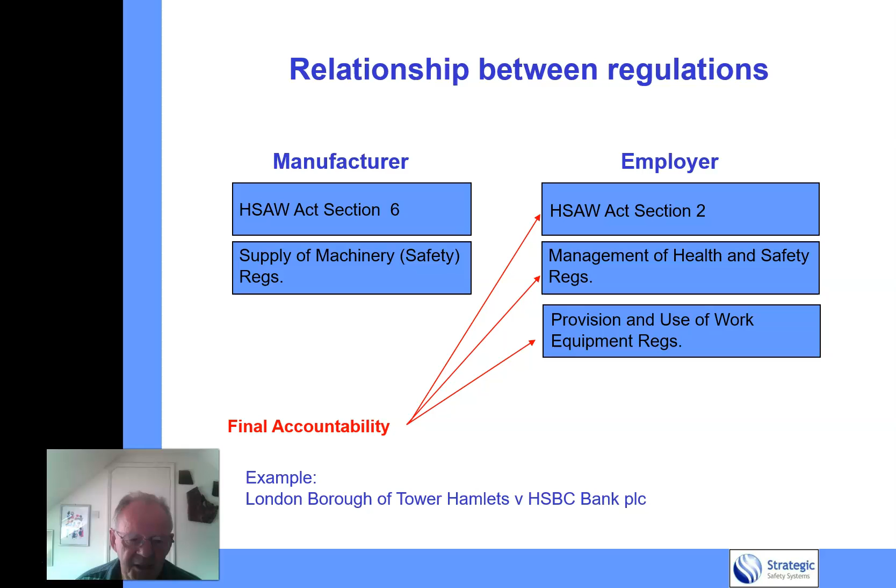And I cite the example of the London Borough of Tower Hamlets versus HSBC Bank PLC, something which happened about 20 years ago, but I was personally involved with. It may seem strange that we're talking about a local council, but it was because this was a shared building. The majority of the building was offices, so it came under the council rather than the Health and Safety Executive.

They didn't need to be exposed, they could be guarded quite easily with a fixed guard, which is what IMA put into place afterwards. But the case was taken out against HSBC, mainly because it was easier to prosecute a British organisation than a Spanish organisation. I was in the unfortunate position where I'd been asked to investigate this machine by HSBC and give my views on the design standards of it, and my report was then used by Tower Hamlets Council in the case they brought against HSBC.

And I was instructed as an expert witness. Fortunately, it never got to court. They pleaded guilty on the Friday afternoon when the court session was supposed to be on the Monday.

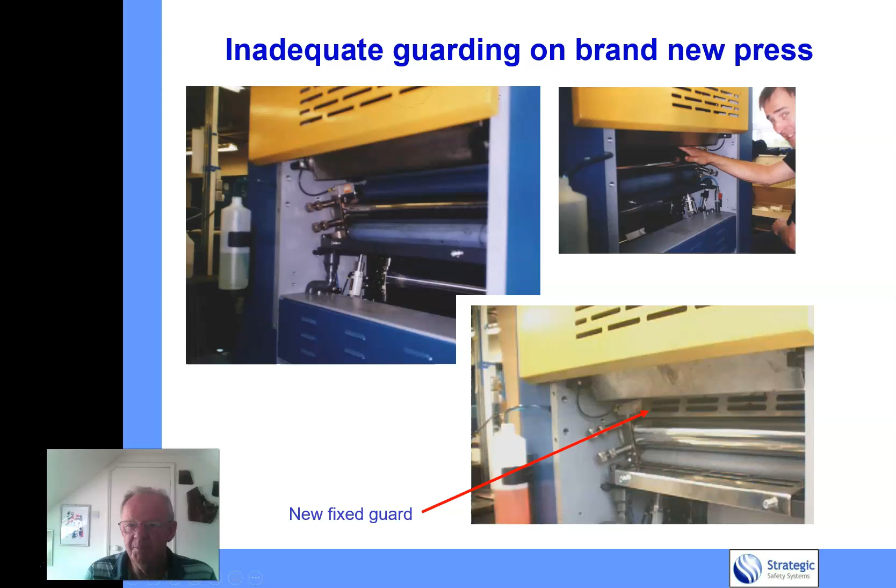What is safety and what is reliability? Safety, in my opinion, is the prevention of hazardous situations occurring. And reliability is the confidence that those measures put in place for safety reasons continue to do their job.

When I started driving, which was a long time ago, about 50 years ago, cars had single circuit braking systems. That is, you put your foot on the brake pedal and that acted on the master cylinder, and hydraulic pressure went through a single pipe, split four ways, to the cylinders on the individual brakes. If you had a leak in that system, then you lost braking completely.

You only had the handbrake and your faith in the Lord to stop you. What happens these days is that cars have dual circuit brakes, that is, there's two circuits. If you get a leak in one circuit, then the other circuit continues to operate and will apply pressure to the brakes. Furthermore, it actually compares the pressures in the two circuits, and if there's a leak in one circuit, that will bring up a light on your dashboard, and that won't go out until you've had it rectified.

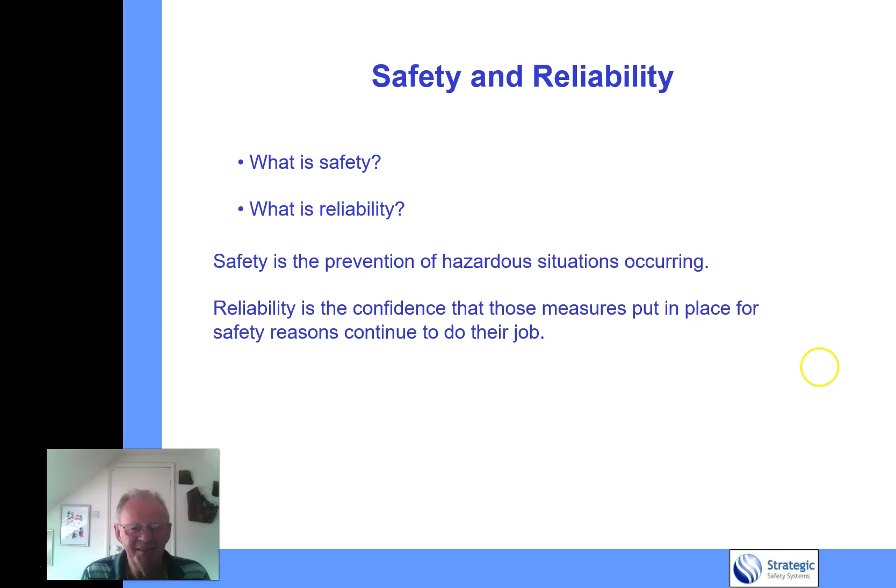Were the brakes in the olden days unsafe? No, they weren't. Were they less than reliable? Yes, they were. So reliability is the confidence that we've got that the brakes will continue to work.

Reliability in safety devices is first about prevention of failure, then coping with failure. So the braking system would actually cope with one system failing and would keep the whole braking system working. But it also has to tell you that something has failed, because it's pointless having a dual circuit or redundancy in any kind of safety system unless you actually know that the failure has occurred. If you don't have that, and one system fails, you've still got a single system left, and you don't know what's happening.

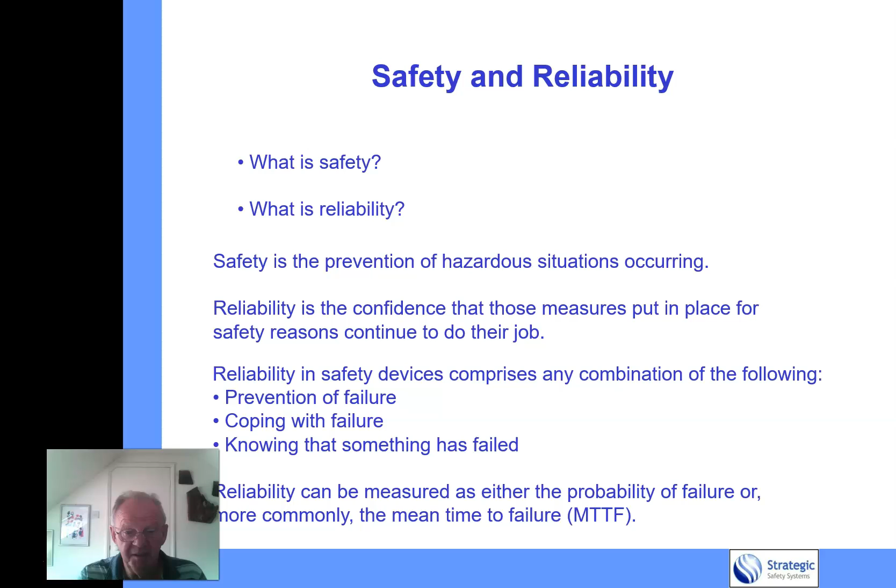Reliability can be measured in probability of failure, or more commonly, the mean time to failure.

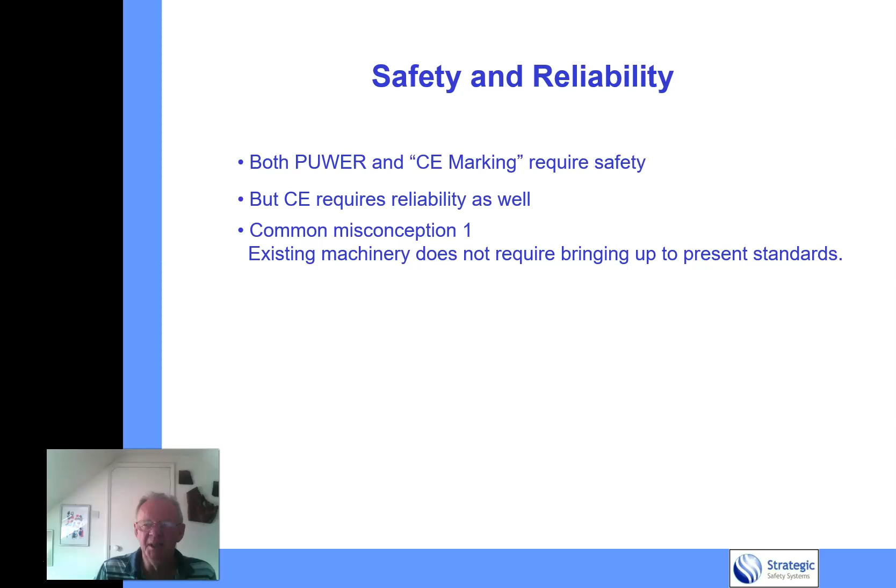Now, the difference between PUWER and CE marking is that both require safety, but CE marking requires reliability as well. The common misconception is that existing machinery doesn't require bringing up to present standards. That's not quite true. Existing machinery must meet the requirements of PUWER - you can't get away from that. But you don't have to bring it up to the standard of reliability that CE marking requires.

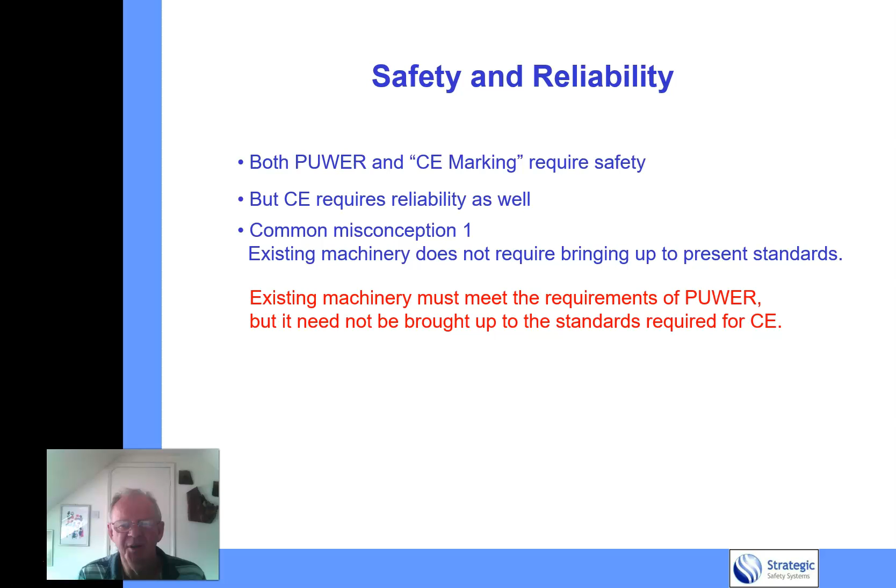Now, I was doing work for Formit. I helped them with their CE marking, and I was providing support for them on a machine being installed at a company in Wellingborough, and there was nothing wrong with that machine at all. Excellent guarding in place - fixed guards, interlock guards, light curtains - the whole combination was appropriate. But next to it was another machine which was completely open, an older machine.

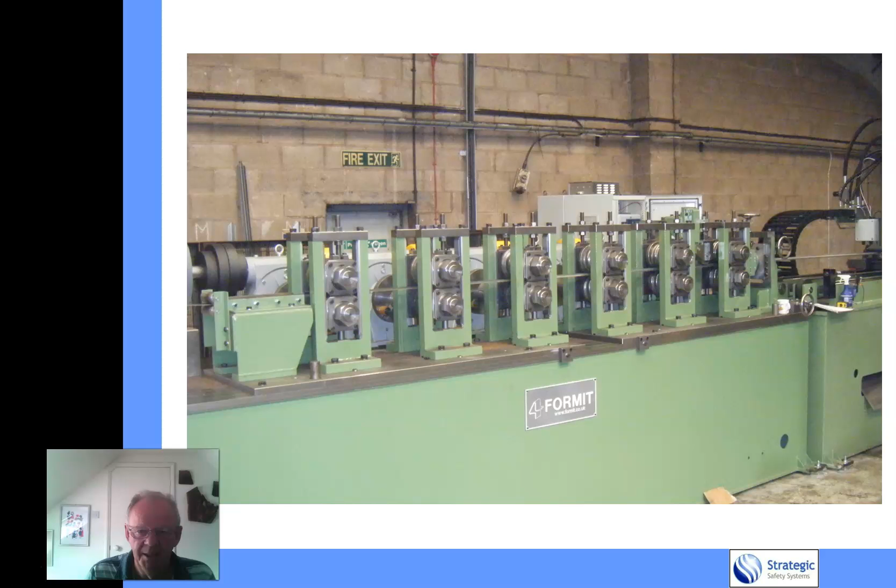Right, the Provision and Use of Work Equipment Regulations have got various clauses in them. Nothing unusual there - it's obviously got to be suitable for the task that's got to be done. If it requires maintenance to keep it safe, then you've got to have a written system of carrying out maintenance. Similarly for inspection, if it requires inspection to keep it safe, then you need to do that. Obviously, controls for stopping, starting, etc.

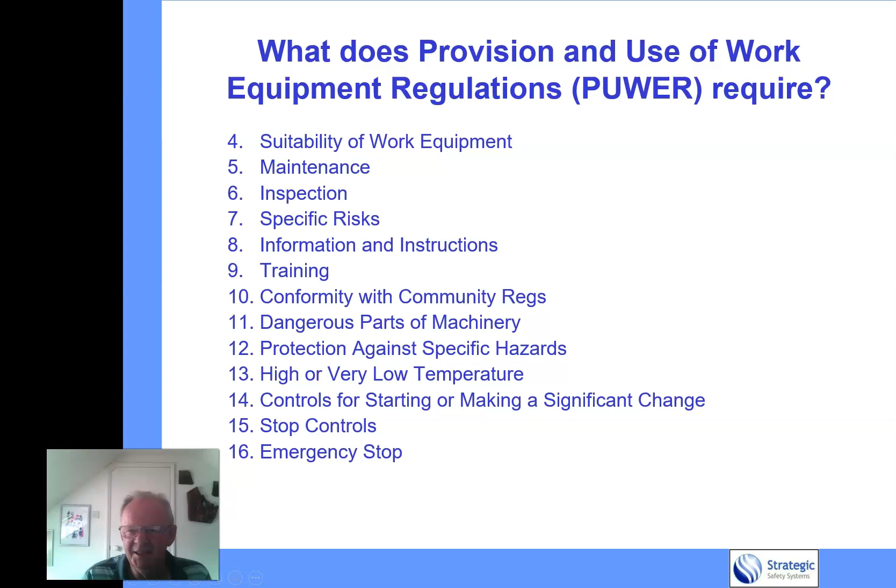And then we've got a whole load of things about isolation. You've got to be able to shut the thing off and lock it out if need be. And then these last things were put in at the last revision because of issues we had over forklift trucks overturning, etc.

Now, PUWER makes no requirement for an assessment. You occasionally get people trying to flog me their services, saying we carry out PUWER assessments as required by the Provision and Use of Work Equipment Regulations. It makes no requirement whatsoever for an assessment. You've got to comply with it, so it would be a good idea to review the equipment to make sure you are compliant, but it makes no requirement - it doesn't actually say there is an assessment required.

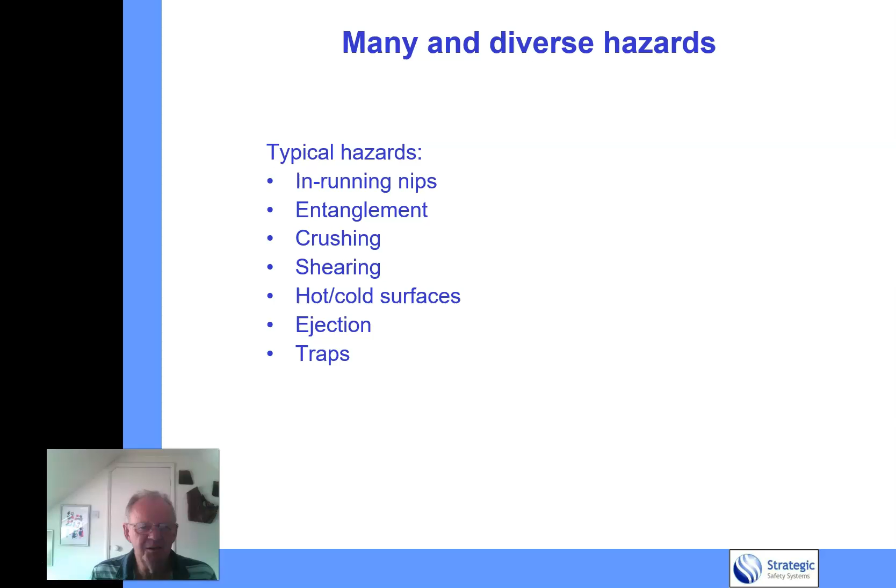There's lots of things that you can get caught on in machinery. In-running nips is a common one, between two rollers running in towards each other, or something like that - you've got a roller going round and you can draw your finger into it. Entanglement, crushing, shearing, all of those things.

The kind of risk controls you've got - PUWER 11.2a puts fixed guards as the primary control, and then you've got other things afterwards. I would actually say, or some people would argue, that proper interlock guards are preferable to fixed guards. Don't know about that, you can argue with that. Certainly, fixed guards are only suitable for those things which you never need to get into, or only ever need to get into for maintenance reasons. So, for example, let's say you've got a belt that goes between pulleys, and you occasionally need to change that belt because it gets worn.

You have to get in there every couple of years or so and do that. Fixed guard is perfectly adequate for that, providing you isolate the machine before you take that guard off. You take the guard off, do the maintenance work, put the guard back on again, and that allows you to run the machine again.

I would put these things in order - this is my sequence of things. Interlock guard: a physical guard that's something you can't actually get through. An active or presence sensing device, so light curtain, pressure mats or something like that - they don't actually stop you getting to the dangerous bit, but they would do something if they sensed you and stop the machine, normally before you get there.

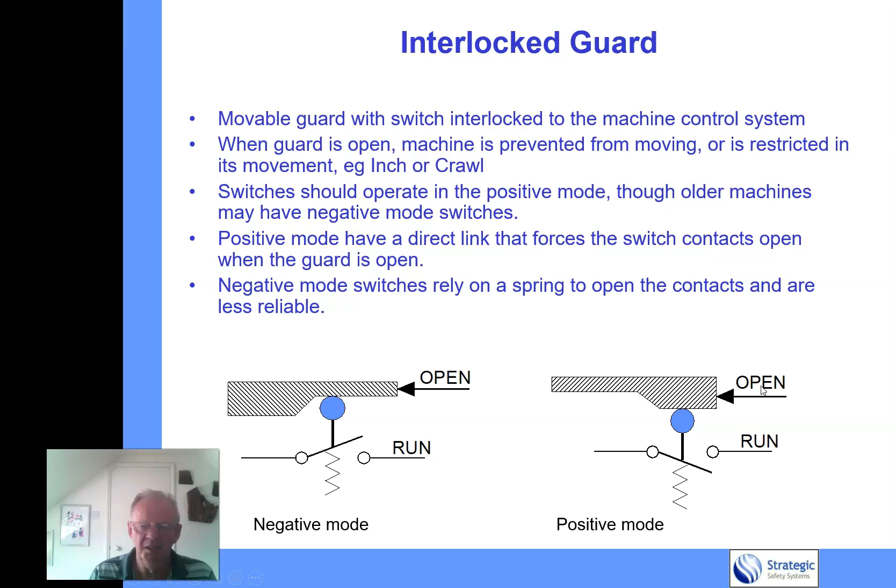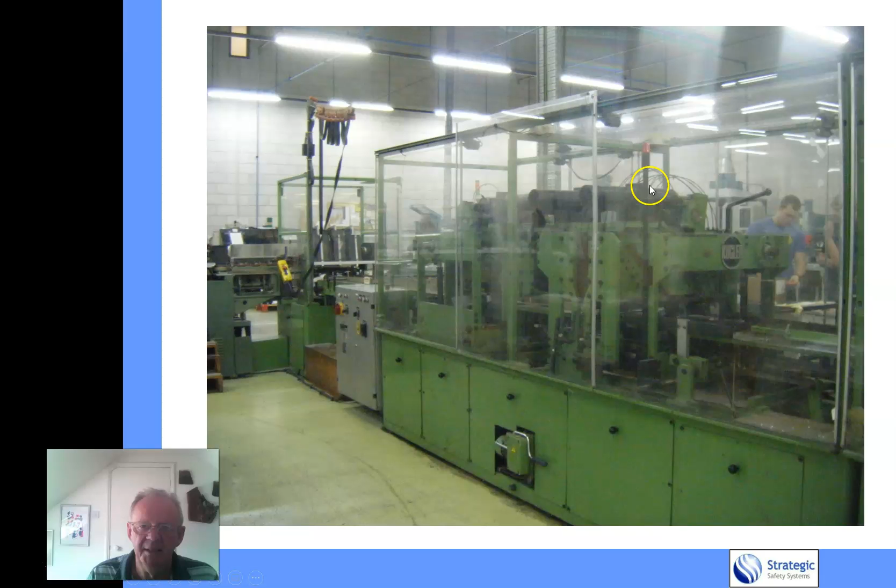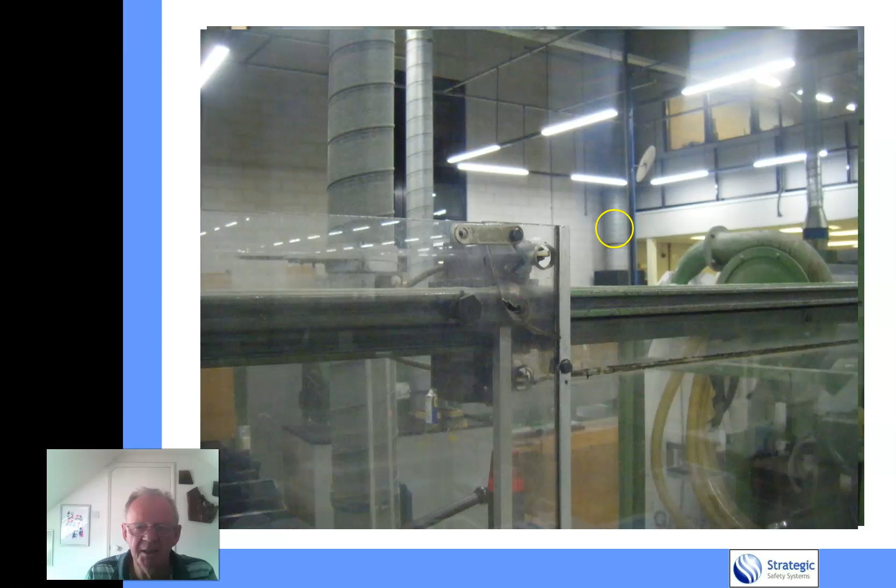You've got to be wary though. This is a machine at a company in South Devon - I can't quite remember what it does, it's part of printing equipment - but it's perfectly safe because it's got this guarding around it, these plastic screens that stop you getting in there. If you look at this thing here, to open it and get into it, you slide this guard, this centre one. If you look at it, it's got a switch operating in the positive mode. Ignoring the fact that the guarding is rather broken, we've got a contact on the interlock switch just there, which pokes through a hole when the guard is closed - that's operating in the positive mode.

So as soon as we slide it one way, the guard contacts force the contacts of the switch open and stop the machine. I don't know if anybody can spot the downside to this arrangement - if you switch it the other way, it will again shut off the machine, but then effectively the switch would be operating in this region of the guard, and it would think that the guard is closed.

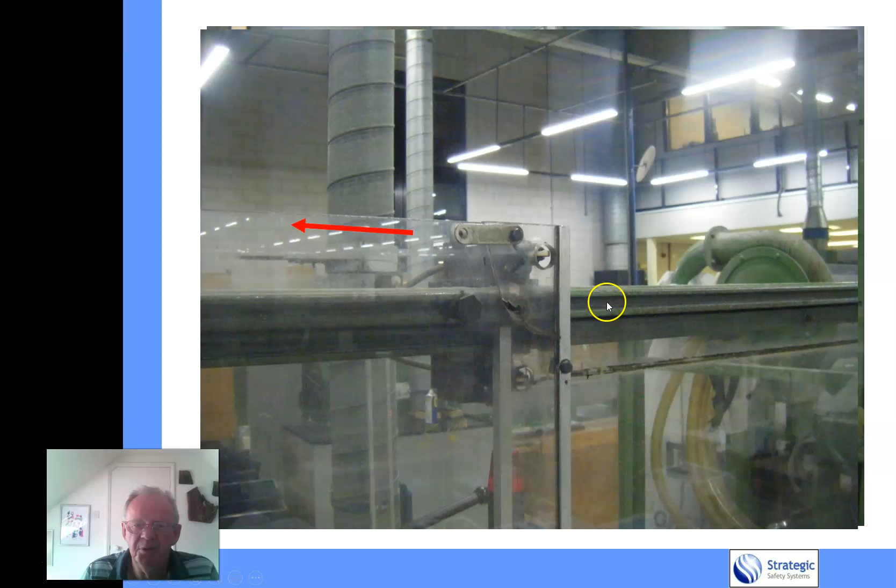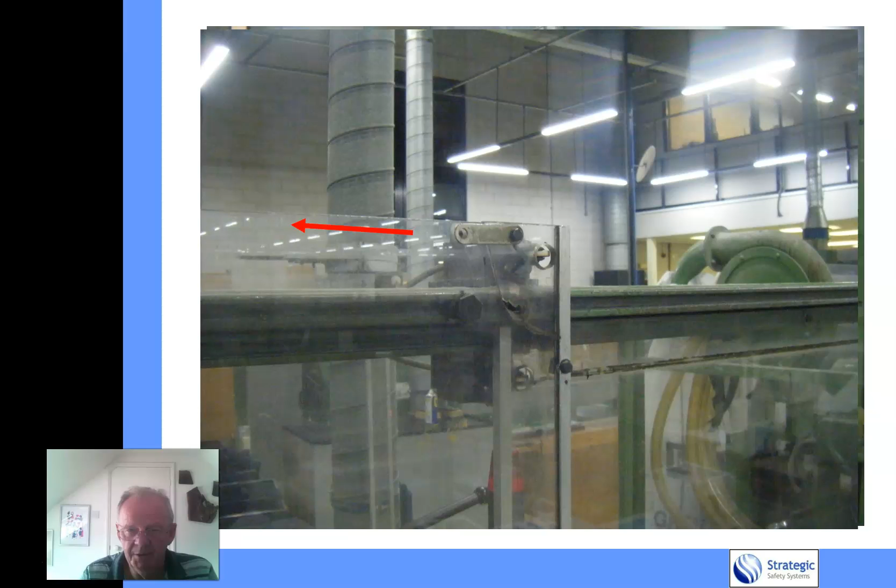That's obviously an unsafe situation, and we quite simply got round that very easily by, at the other end of this track, we just put a bolt through there, poking out, which stopped you moving in this direction. It's a 20-pound solution to it.

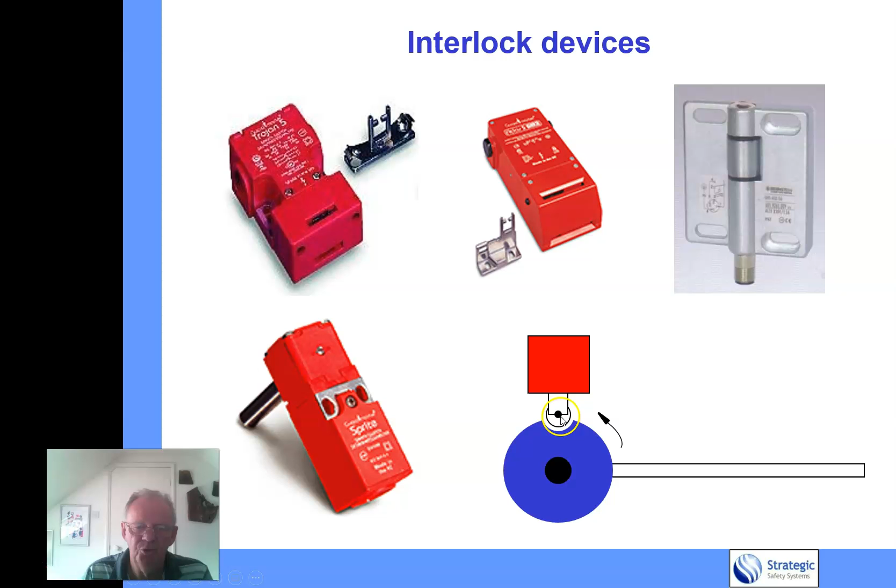Here's an arrangement where we've got this guard, which when you pivot it about this shaft here, it will force open the contacts in this switch. This shows that arrangement, but you've got to be aware of that - this is the guard, this mesh thing that pivots about this shaft.

It's on a Mark Andy roll label printing machine, and I don't have the confidence that cam is going to contact that switch. It might just about do it, but it doesn't look like it. So you've got to make sure that it does actually contact that switch.

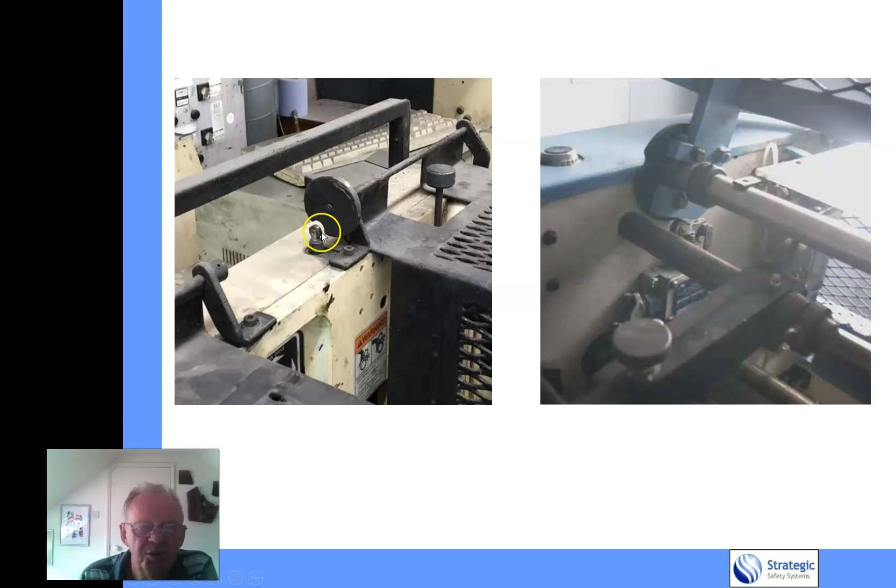And here's another piece of machinery, again with a cam and a switch just there. But this shaft, this guard here, can slide from side to side - bit of a sloppy thing there. And if I moved it to this far left direction, which is what I did, the cam would no longer engage that switch, so it wasn't actually operating.

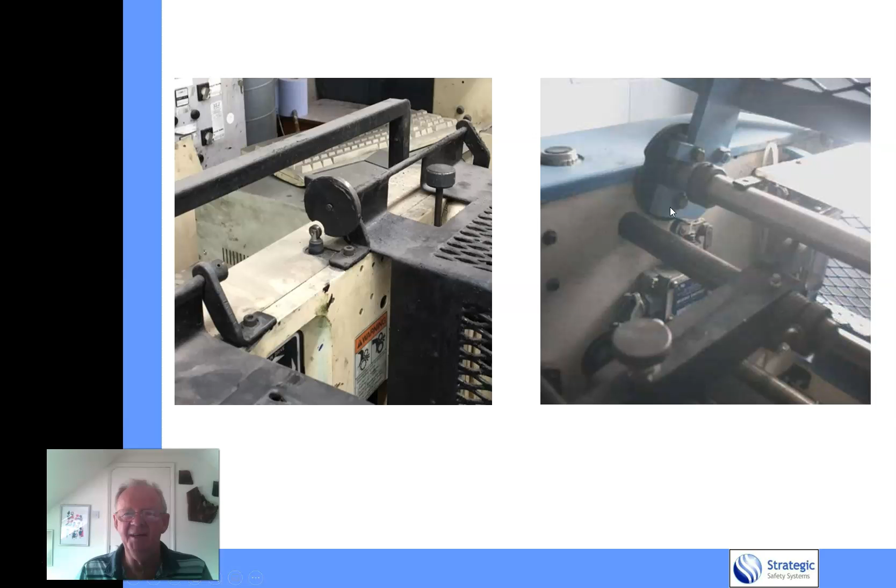We have to put in a little packer piece in there to stop you moving in that direction to get around that problem. It didn't take very long, just a bit of angle iron that was bolted in, but it's something you've got to realise.

Now, the first rule of mechanical guards is they must be practicable. This was a company up in Clitheroe, somewhere in Lancashire, and they'd had a visit from the HSE. This company makes very complicated components, predominantly for Rolls-Royce - the big fans on the front of Trent engines are made by this company. But they've got a couple of little machines like this in a corner, and the HSE said that it needs guarding.

So they put this interlock guard in there. And you cannot operate that machine with this guard closed. So it's a totally pointless piece of guarding. It is totally useless.

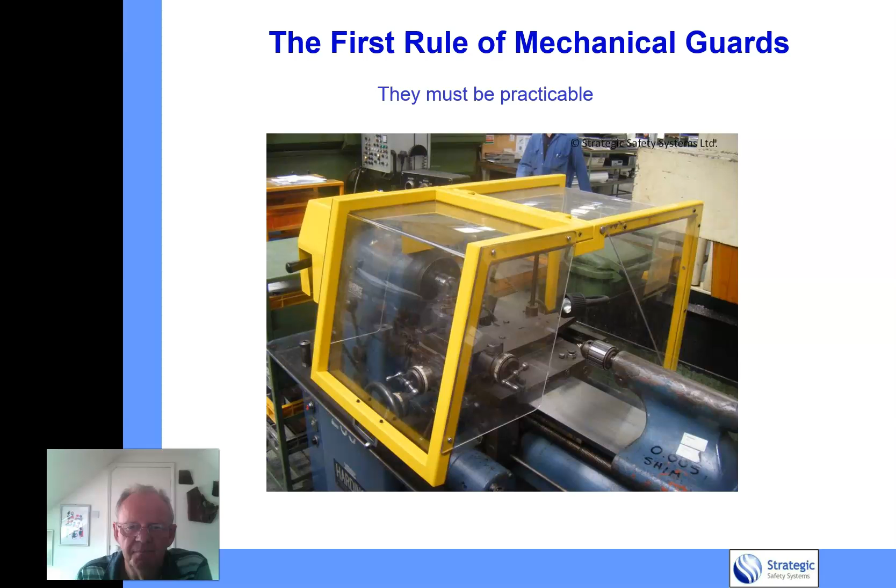Now, this bit is something you would never get in any textbook. I don't know why, but nobody's ever written this down. But I believe that there are three general categories of mechanical guards: immediate, local and perimeter.

Now, immediate is something just right at that point. You notice that guarding there, it stops you getting your fingers into that danger area. Local is something which is far more common and preferable, and that's to have a guard around this whole thing there. And then perimeter is you put a guard around the whole machine.

Now, local is by far the most preferable of the three alternatives. With immediate, you've got to be very careful about the kind of hazard that you are guarding. If it's operating very quickly, then that won't do any good at all.

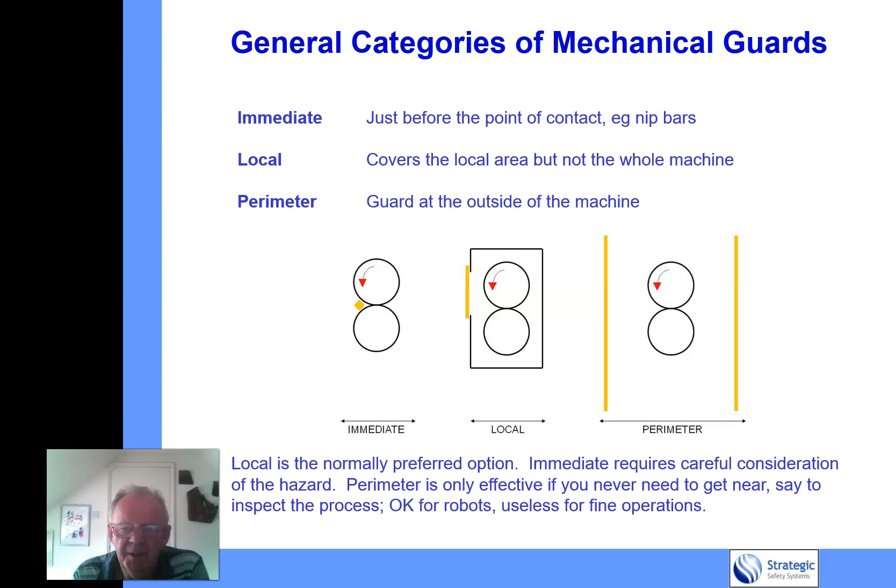With perimeter, which you might get with, say, an injection molding machine, with a robot unloading that machine and putting it onto a conveyor which goes out through a tunnel guard, that's great. But if you need to get in there and do anything, perimeter is useless.

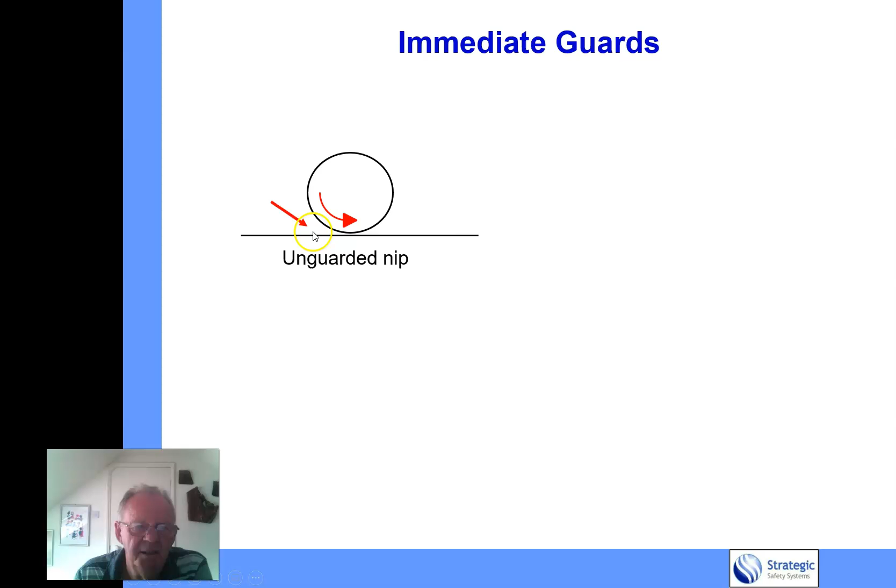Now, here's an example of an immediate guard. We've got this in-running nip here. You don't need to have two rollers - it could be between one roller and a fixed surface. The way to stop you getting your fingers in there is to have this fixed immediate guard here. It's got to be at 90 degrees - you can't have a wedge shaped guard, that's useless.

The requirements, the general guidance you won't find written down anywhere, but the general rule of thumb is that it should be 6mm maximum, because you can't get your finger into a 6mm gap. Now, be very careful with this, because if you've got something like a rubber roller, then that will deform and can get your fingers in there.

I had an accident with a company down in Southampton where somebody got his finger wedged in a 3mm gap. Now, you try and get your finger wedged into a 3mm gap, it's very, very difficult. But if you've got a rubber roller which deforms, then you get your finger stuck in there and you can't get it out.

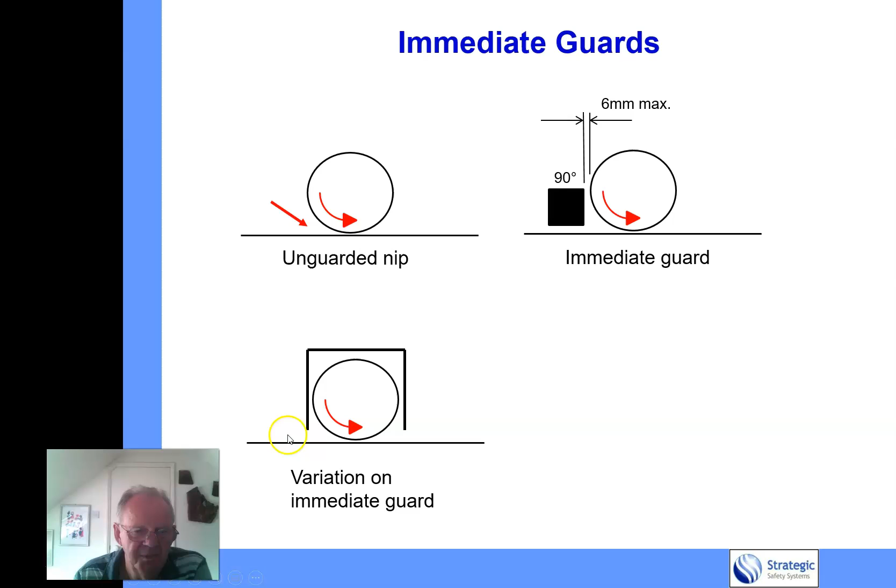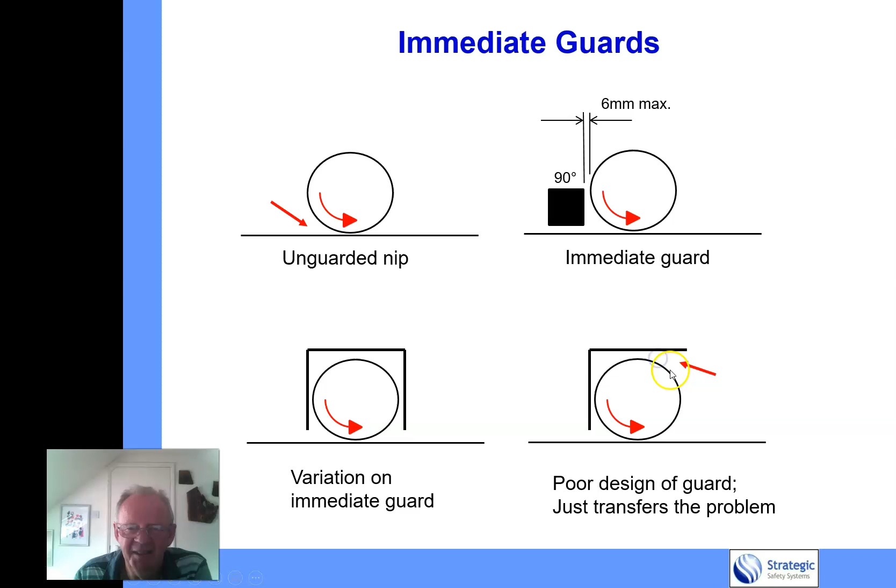There's a variation on an immediate guard, which is this, and that's fine. No problems with that at all. You can't get your fingers in there, and that's great. But what you mustn't do is do this kind of thing, which is just shifting the problem from there round to there. It's a poor design of guard. You've got to think about what you're doing with the guard when you put it in place. It's not only the primary control which is there, it's the other thing.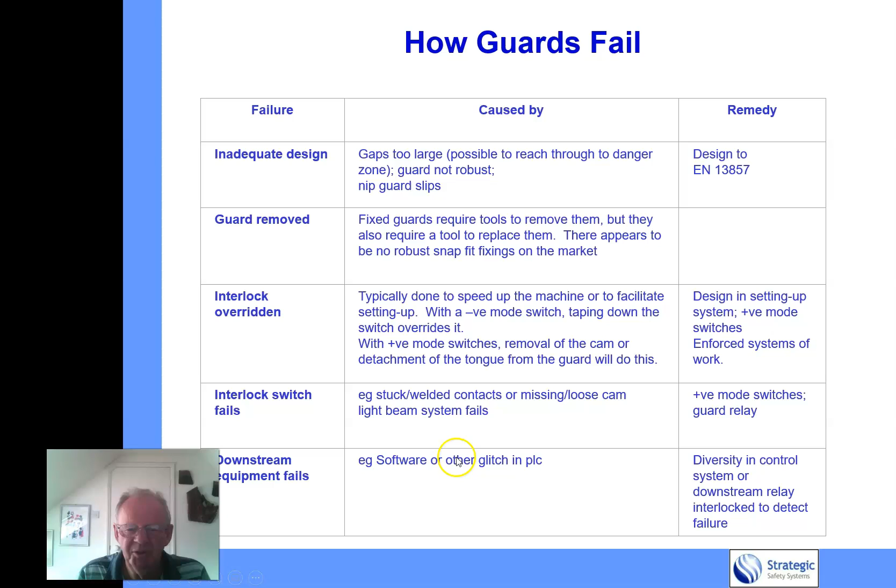You can override the interlock, taping it down, and you can do things there. The interlock itself can fail - stuck or welded contacts, or there could be downstream equipment or a glitch in the PLC. We'll come to that later on. Active devices - you've got all of these things: light curtains, pressure mats. I don't think they are as effective as a physical barrier.

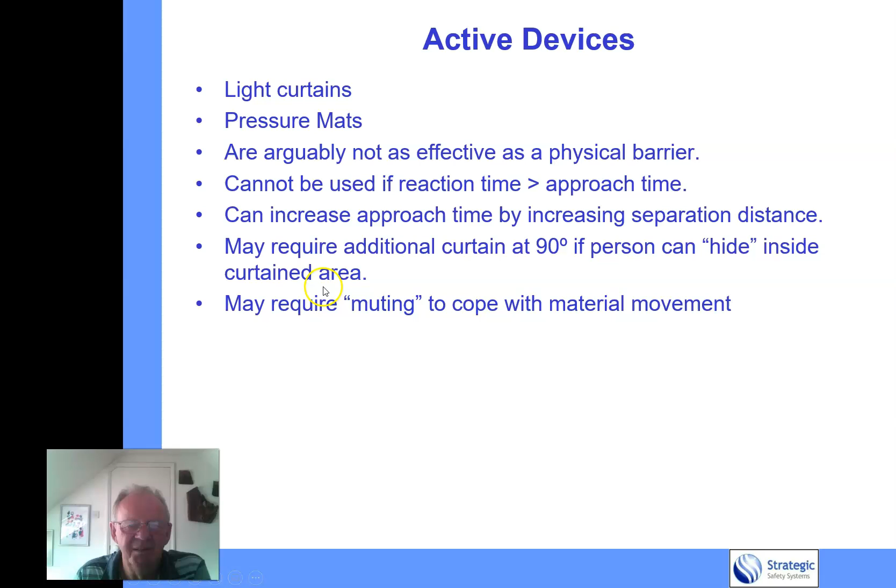You can't use them if the reaction time, the time to stop the machine, is greater than the time it takes to approach the danger area. So if you're just putting your hand through a gap, the machine has got to stop pretty quickly. You can increase the approach time by putting the light curtain further away, but then you've got to cope with people being inside that area.

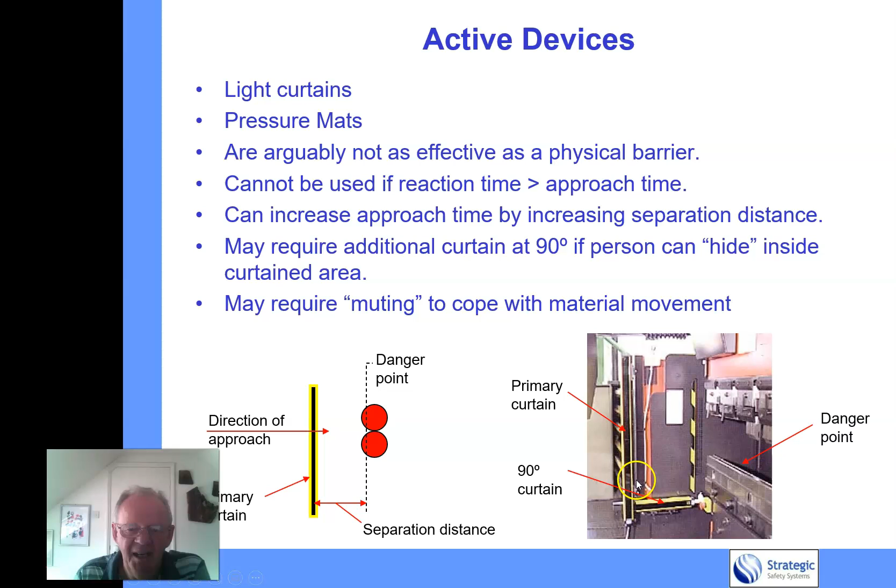So, for example, this is the kind of separation distance. This is one way on a metal press brake where they increase the separation distance, but then they put this other horizontal light curtain which will actually detect that somebody's standing in that area. If you didn't have that, you could break the light curtain and be inside that area, and the machine could then start up because the light curtain is no longer broken.

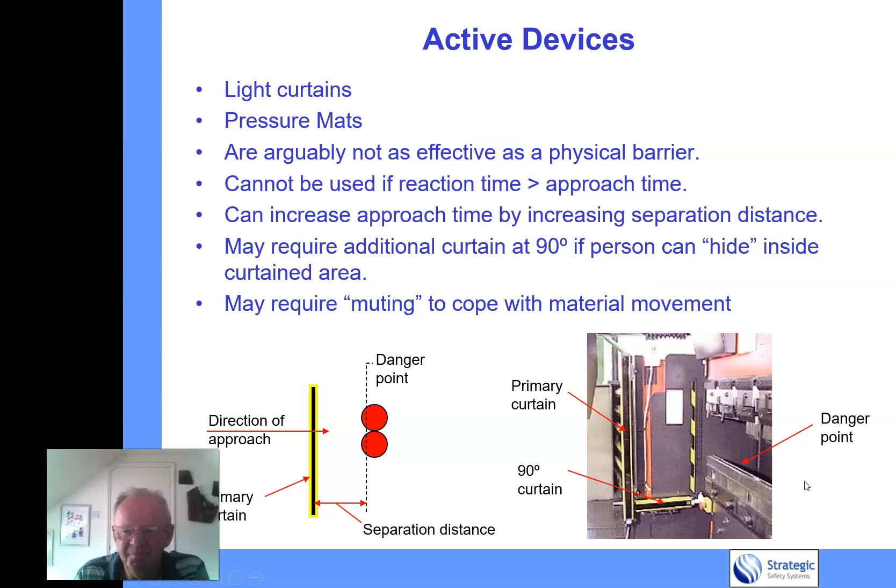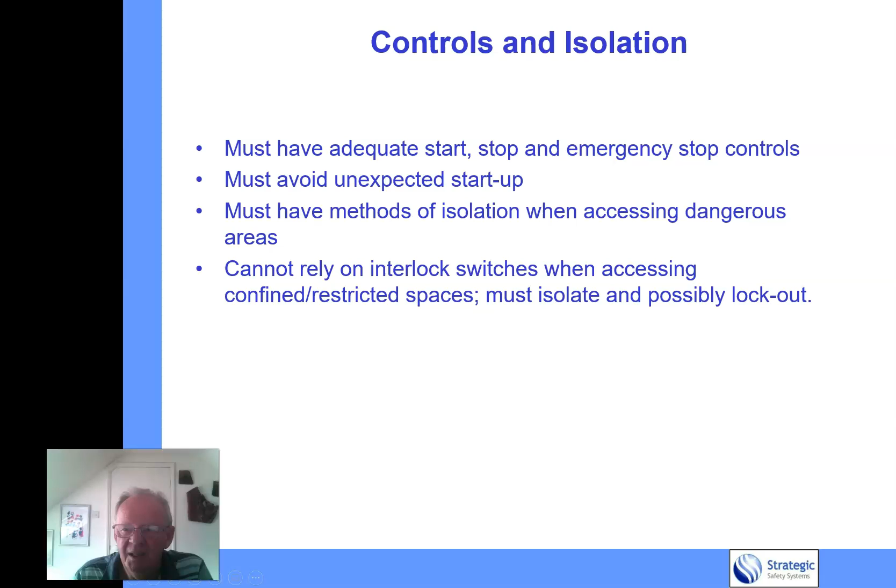You must have adequate stop and emergency stop controls, and methods of isolation when accessing dangerous areas. You can't rely on interlock switches, and you need an isolation and possibly lockout method. So a lot of isolation switches would actually have a hole which you can put a lock through to stop it being operated when you're in the position of danger.

CE marking applies to machinery put into first time service after the 1st of January '93, so quite some time ago. It was originally intended as a trading tool between the EU member states. So the idea was that if you made a machine here and exported it to France, the French would accept it as being compliant and wouldn't have their own set of requirements put on top of that. So it was really a trading tool between the member states, but it says supplies or puts into service.

The original regulations actually say, with stronger wording, that the person who supplies or puts a machine into service, or makes a machine for himself, is regarded as a supplier. So basically, if you supply or put a machine into service, even equipment for self-use requires CE marking.

Now, if you obtain machinery from outside the EU which has not been CE marked, then you become the supplier. So you've got to be very careful with that. And even if it's an old machine, built before the 1st of January '93, if you bring it into the EU now, you must bring it up to the present standard.

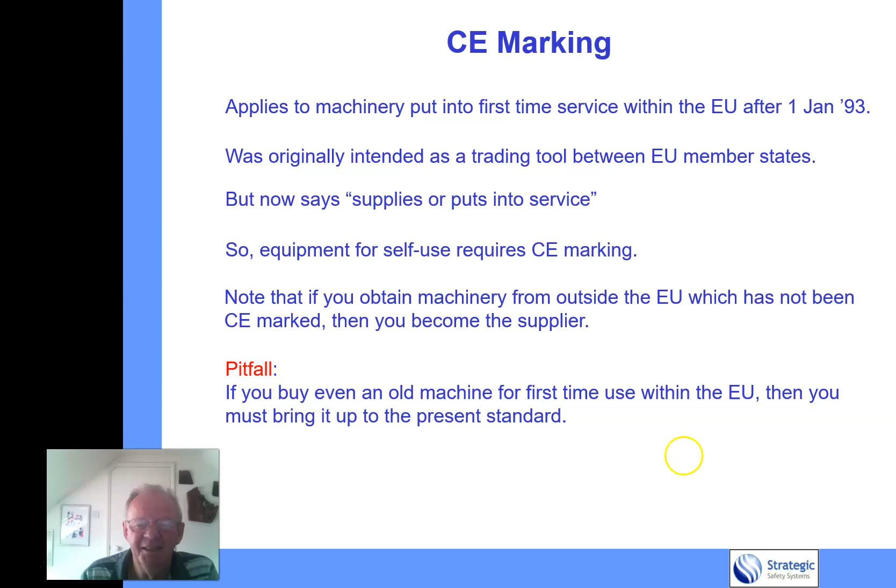So what you've got to have is something in your purchase contract that says the supplier outside the EU must bring the machine up to the appropriate standard for CE marking. They must be the CE marker, if you like.

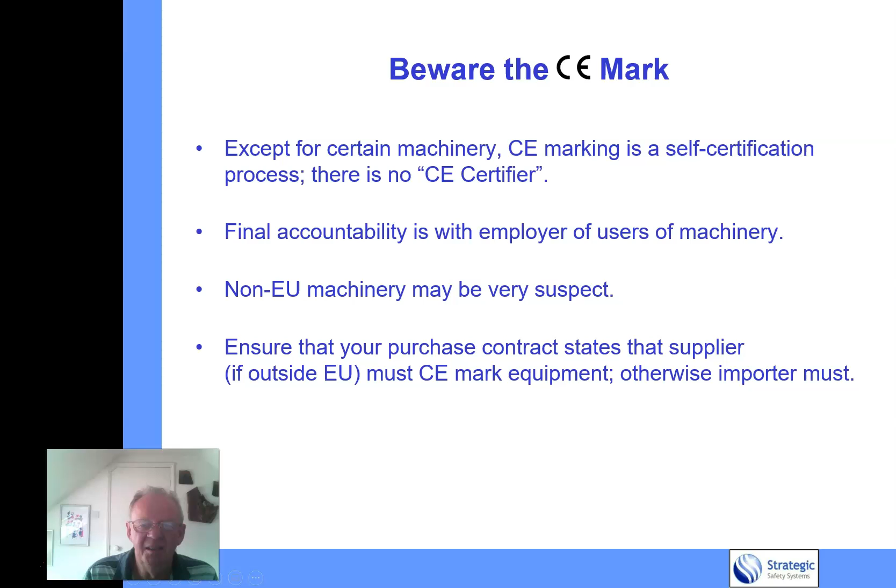It is a self-certification process. The final accountability is with the users of the equipment. So always suspect that equipment from outside the EU may be dodgy.

Requirements of CE are to design and build the equipment so it complies with the essential health and safety requirements specified in the supply machinery safety regulations or harmonised European standards. The supply machinery safety regulations, by the way, is the UK's equivalent of the machinery directive of the EU. The EU produces a machinery directive, and each state produces their own regulations from that directive. You must build it so it complies with that.

You assess the equipment for conformity with those requirements. You must be able to compile a technical file proving conformance. You don't have to provide a technical file, but you must be able to compile one if requested, either by the client who is putting that machine into operation, or by the HSE. And then you draw up a declaration of conformity and you fix the CE mark to the equipment.

There's a few things in there I'll just draw your attention to. EN 13849 is the standard for safety related control systems. It's very user unfriendly. It's obviously a standard which has been put together by a committee of people who didn't like each other, and they've got various fixed ideas, and it zigzags backwards and forwards between different approaches within it.

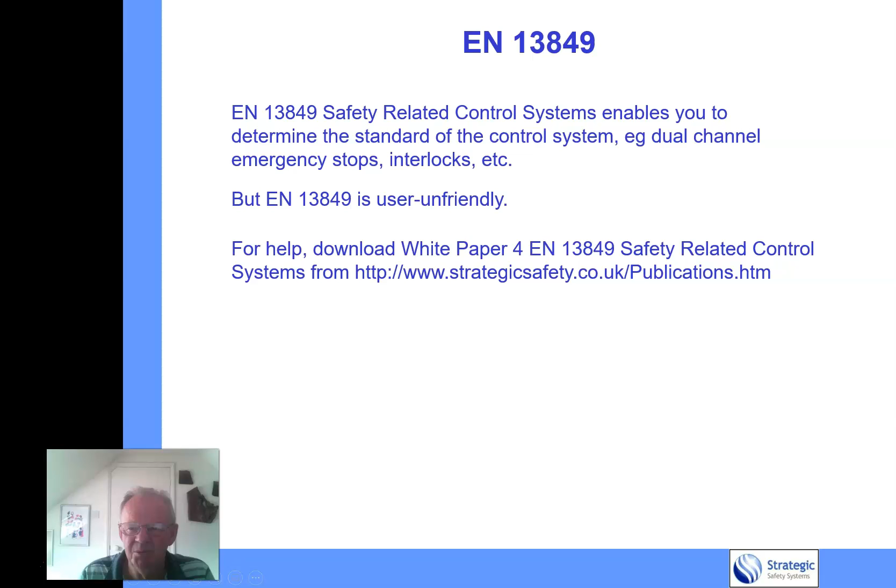So what I've done is create white paper 4, which you can get from this particular page here, the Strategic Safety Systems publications page, and you can download that paper, and it tells you how it's much friendlier than the standard.

But what it requires you to do is to calculate the required performance level for each channel depending on what's going to go wrong - the severity of the injury, the frequency they're exposed to the hazard, and the possibility of avoiding that harm. You start there, and it may be that you've got a reversible injury, which would take you up to S1. You've got frequent exposure, which is F2, and it's possible to avoid it under specific conditions, which would take you up to a PLR of B.

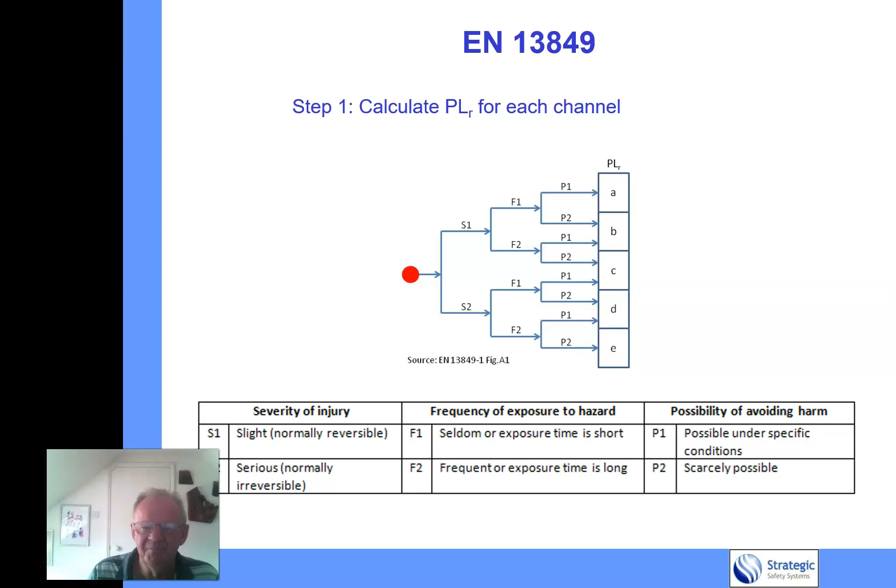And that would say that different ways of actually meeting it are controlled by that. So if that's the PLR there, then you could use a category B or category 2, etc. These are much higher standards of control systems as you go along.

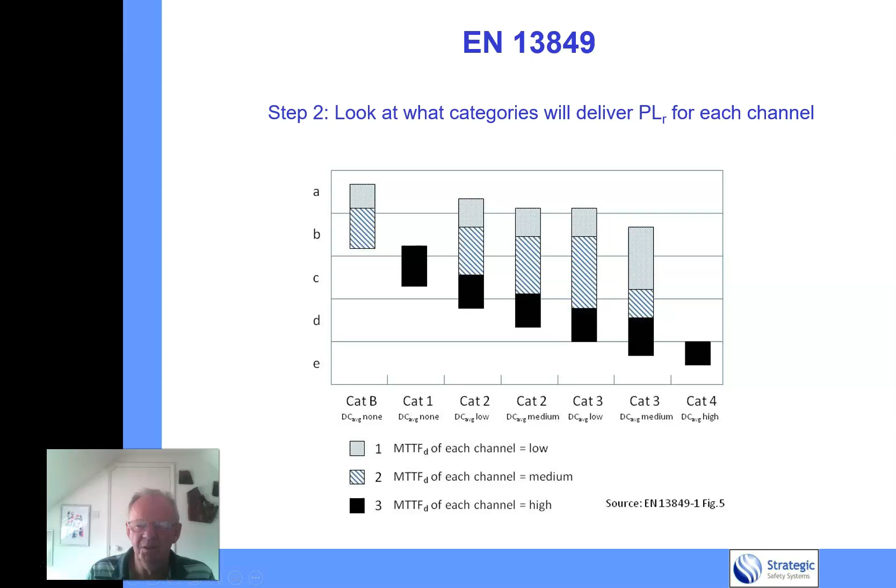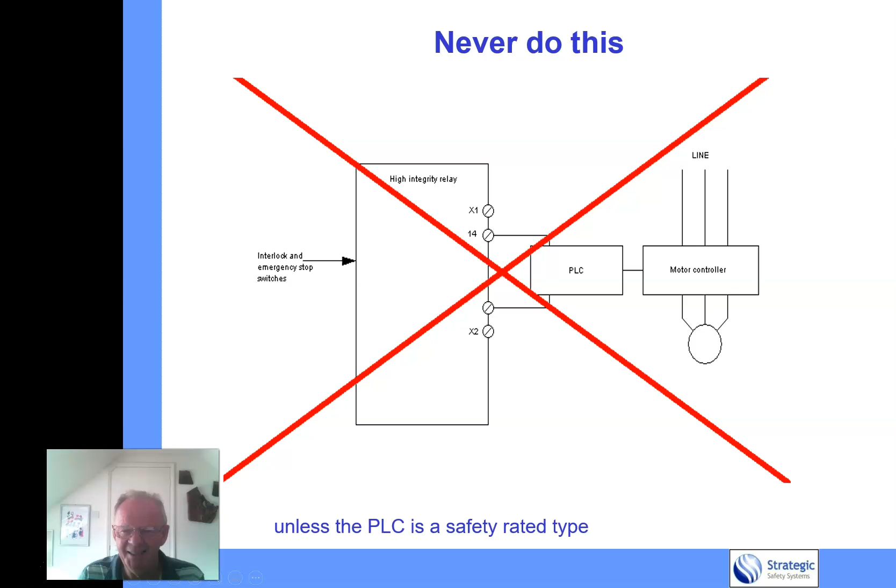I strongly advise you, in fact I would say more than strongly advise you, never ever do this. You can have a high reliability interlock and emergency stop switches, so we've got maybe dual circuit interlock switches and emergency stops going into a relay, a PILZ type relay - other manufacturers are available - a high integrity relay. But if you've then got a high integrity interlock system there, and then you stuff it into a PLC - now, PLC, programmable logic controller, you've got no control over what the program is within that. So if it's a standard PLC, you might run into trouble there, and so you must never do this unless the PLC is a safety rated type designed for doing this kind of thing.

And the question was asked, how could this happen? Because it's got an interlock on there, he must have been doing something wrong - he must have overridden the interlock, otherwise the machine couldn't start up. But when I looked at the circuit diagram for the machine, I found that the interlock actually went into the PLC as a feed there, and it was quite obvious that the PLC was busy doing something else, waiting for the next part of the program. And because it was paused during that, it couldn't actually provide the safety function.

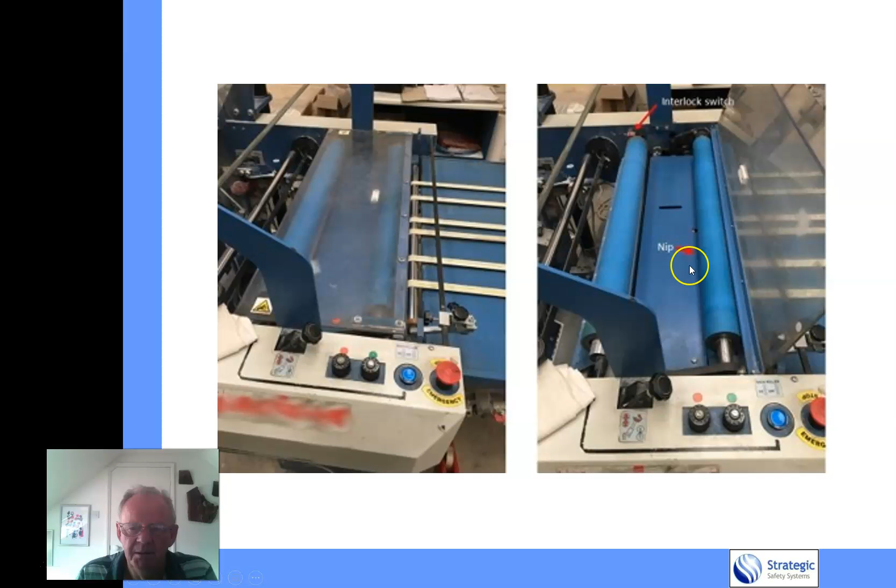So as soon as he got rid of this blockage here, it continued on its way, and took no notice of that. So you mustn't ever do that.

So if the machine was built in the UK and it was being used in the UK, then it would have the UKCA mark, that one. However, if we were exporting it to the EU, then we still have to have the CE mark. Now, if it was starting off in the EU and coming into the UK, I don't know what's going to happen. I don't think that countries would be putting the UKCA mark on - I think they'd be providing it with a CE mark. I've got no idea.

Obviously, countries outside the EU and the UK providing equipment to the EU require the CE mark. But then the countries outside the EU and the UK providing machinery to the UK, will they be required to use the UKCA mark? I've got no idea. Nobody knows. Nobody can tell you at the moment. It's up for grabs. Well, that's the end of this talk.